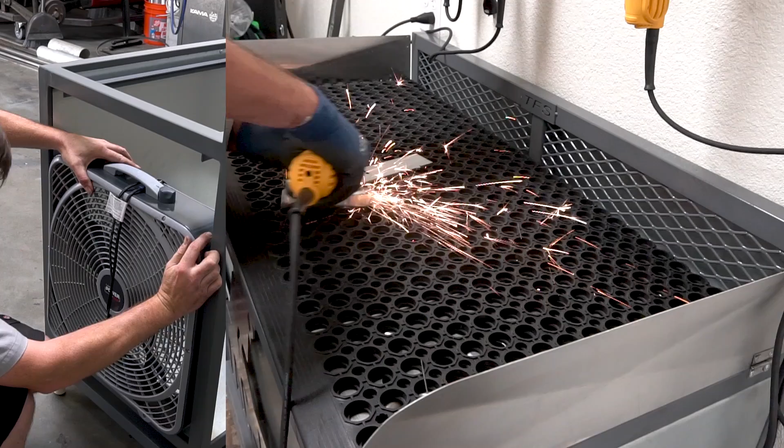The list goes on. But if you lack that kind of budget, or maybe you don't want to spend that much money on a table, or you're just looking for a really cool DIY project for cheap, well then you do what I do. You set yourself up a budget or a target. In this case, I want to spend no more than $500 to make this table fully functioning with nothing more than off-the-shelf components from my local hardware store and a little bit of ingenuity.

You're going to see me using some pretty fancy tools to get this job done. Let me reassure you, you don't need those fancy tools to do it. Let's just take the paneling. If you don't have, let's say, a CNC plasma cutter like I do to do this job, you can absolutely grab a hold of some power shears, double cuts as they call them, a jigsaw with a sharp metal blade on there, or a pair of tin snips. Pretty much anything stronger than a pair of scissors is needed to cut sheet metal that is 20 gauge.

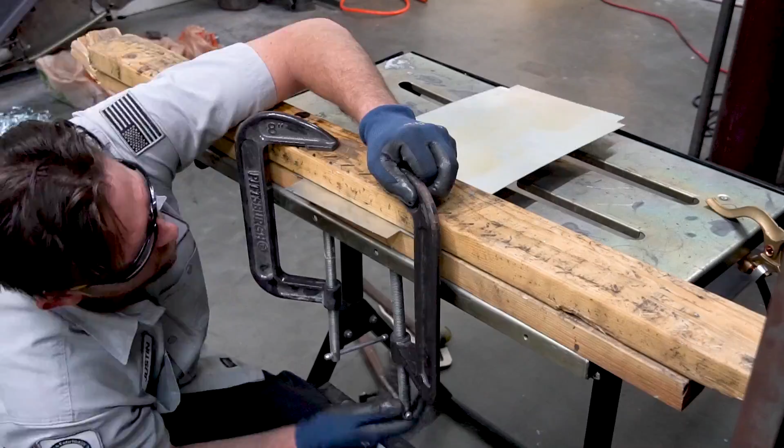That's the panel size that we're using. As far as bending is concerned, if you don't have a box and pan brake capable enough like I do, you can absolutely grab like a block of wood, bang it over with a hammer. You can definitely use some pieces of metal between two clamps and force it over that way. Pretty much anything that will make or shape the part that you're looking to build will work. All you have to do is come up with something clever and make it all happen. Remember, there's no right or wrong as long as the result is correct.

The second thing is CAD. I have to have CAD in order to tell the machine what to cut out. Now, you don't necessarily have to have CAD at all. In fact, I was going to make this cool 3D rendering and spin it around and make it come apart to make the video look cool, but I ended up getting more frustrated because, like many, I already had the design inside of my head, so I could just get to it.

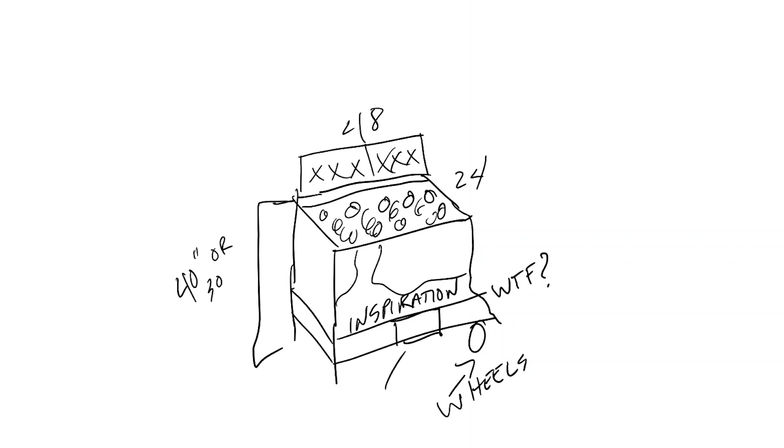I'm starting off with a 24 by 48 inch tabletop. That's the size in general of my table, and I got my height set to about 40 inches because I'm relatively tall. All of this, the steel structure, is going to be made out of 1.5 inch square tubing with an 065 wall. This stuff is cheap, very easy to work with, and let's just get right on it.

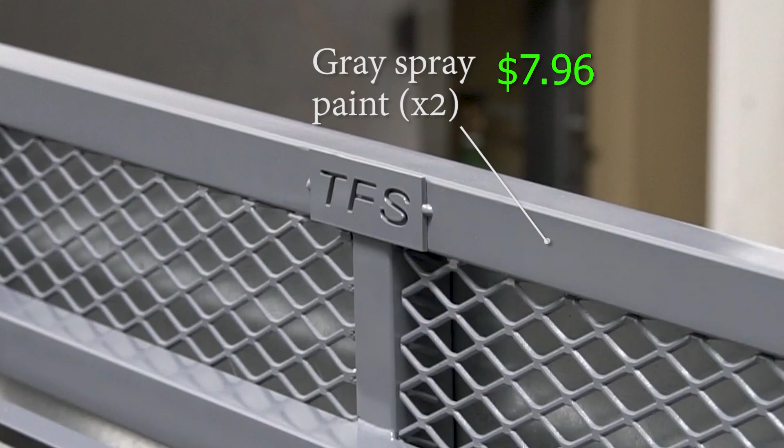Now you might have noticed that there was quite a bit of a jump in that montage that was just put together there. To tell you the truth, the worst two words in the entire YouTube language dictionary are dead battery. So that's why we got a little bit of a jump as to where we're at right now.

But luckily this is just a steel frame design with a few options in it, which we can go over right now. The first one is the back catch. The back catch is built into the frame itself. I've seen a handful of tables out there and they have the catch bolted up to the top of it, and it's kind of separate from the table, but it feels like it takes up a lot of unnecessary space. Instead of building a separate catch bolted to the top, I integrated it into the table by extending the length of the rear tubes and offsetting the tabletop for clearance. So now the sparks and all the junk will fly off the part and go into the tub, thanks to this cheap sheet metal panel that I put on the back here. It just deflects it right down into the tub.

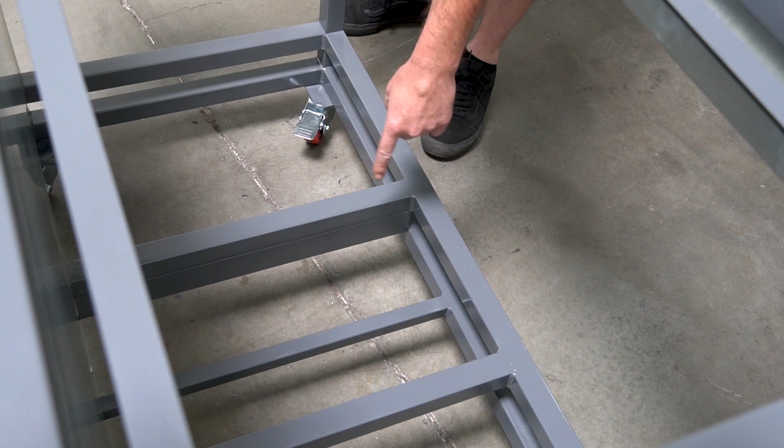Now down below is a section for the drawer. The drawer will make cleaning the tub out a bit easier since I won't have to take the slats off the top for regular servicing and cleaning. I just pull the drawer out, empty it, throw it back in. Now I also added locking caster wheels to only one side.

The opposite side has some tubes with foot pads on it. Now why would I only do 2 wheels instead of 4, you might ask? Simple. 2 wheels cost less than 4, and I only need 2 to move it in and out of the machine room. These legs are from the scrap pile, which cost nothing.

On the front of this machine, which you guys can't see right now, is the name and inspiration for this table that I cut out on the fast cut. I'll reveal that later, but that's why this panel is already on here, kind of blocking it. The big thing to pay attention to here: this is already painted, which means my design has already been made up, everything is done, and I have no more welding to do.

After this, it's nothing but adding paneling. So it's really important that when you get to a stage like this, you are definitely sure before you lay down the paint and all the rest of that good stuff. So let's get some of these panels together and get moving on.

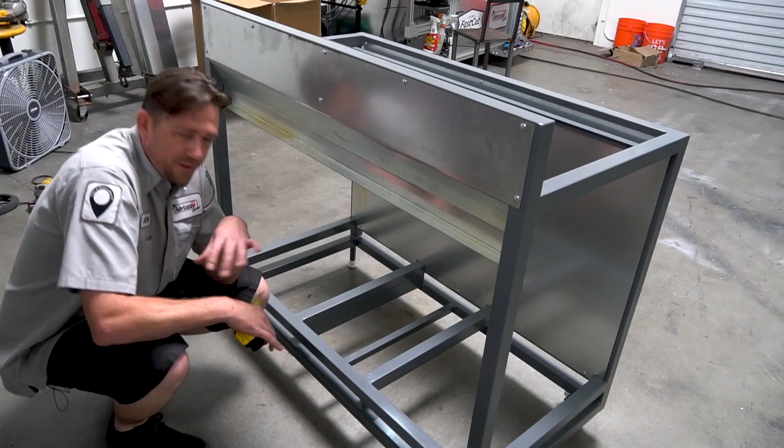There's a couple of things we have to consider when building something like this. One is the orientation and order the panels need to go in here. That's really important for one primary reason: this is a cheap, budget-friendly design, but I don't want it to look like a cheap, budget-friendly design.

I don't want to see thousands of screws all over this thing. I definitely don't want screw heads visible on the front or the sides. On the back panel, yeah, we're not going to worry about that, but I want it to look clean. I also don't want to reach my hand down into the tank or tub and get sliced open by a bunch of screws poking through there. So we really got to consider how these panels are going to attach.

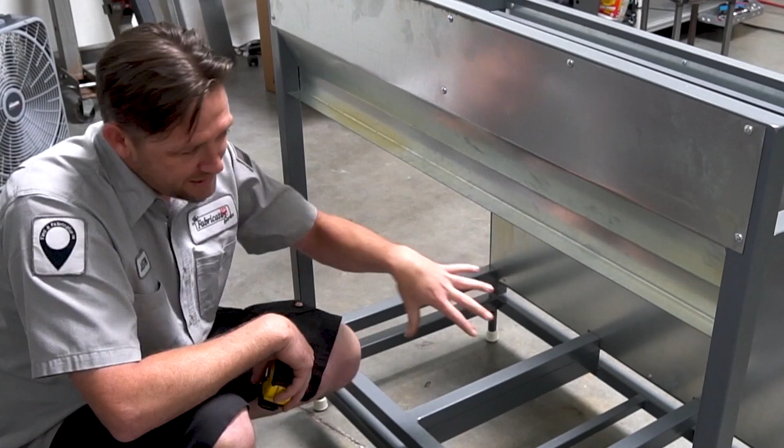The second thing is serviceability. The filters I'm using are very large. They're reusable furnace filters, but with the flow requirements I need with 2 box fans, one on each side, the filter has to be a little bigger than what can come out of the top by my design. So I'm going to do a removable lower back panel that will allow access to the tub for cleaning and servicing the filters.

No big deal there, but the order I put these in is really important. I'm kind of making this up as I go along because I've redesigned this 3 or 4 times, but I know with the order I'm going to use, to minimize the amount of screws, which also drives our budget down, there's going to be a lot of overlapping in the panels, and one single screw will hold it all together.

You'll see all that come together. I have the upper panel for the catch on there, I have the front panel on there, or at least in place, not totally secured yet. The next panel on my list, based on this design, is the floor pans, then the sides with the box fans, then we'll do the back panel last since that's the removable, accessible one.

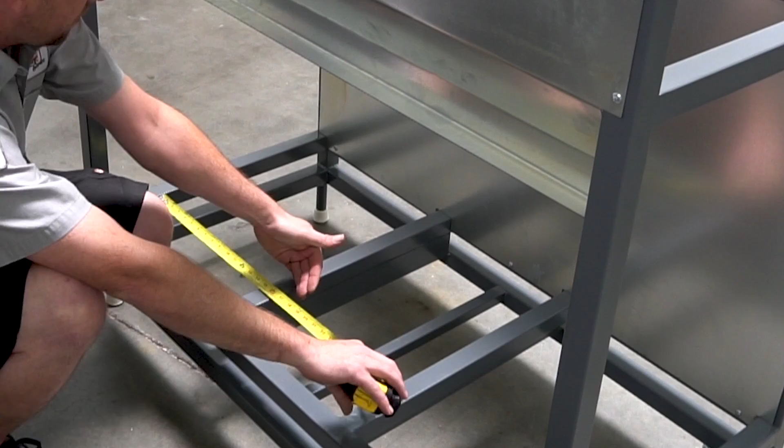First measurement I need here is this lower one. I got 16.5 inches going this way, and 21.5 inches going this way. To make sure all our panels overlap and still fit, we need enough overlap on this tube, but to keep it clean I want to make sure it doesn't go all the way to the edge. I've got 1.5 inches to work with, so I'm only going to put about 1 inch of overlap on this.

On this side, the opposite side, there's that inspirational name for this thing, so I can't drive screws in from the front. Even if I did, I don't want to see them. So where it attaches to the front panel, it will break downward. The rest will be flat with an overlap, a 1 inch overlap.

Over on the side here where it goes down to the drawer, we're also going to do an overlap to keep it clean and make sure no trash gets underneath the sheet metal when we get it all together. So with these dimensions in mind, 21.5 by 16.5, we need to make sure we have 1 inch on each side for overlap. Super simple, let's just knock that out. 2 of them.

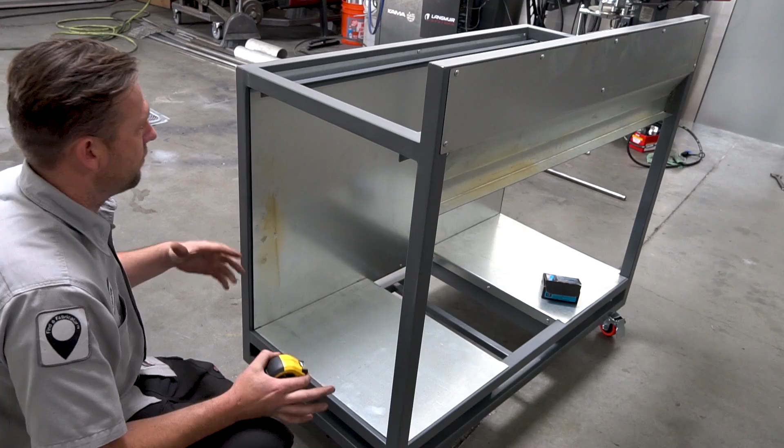First things we need to consider: the total width and total height. In this case, we have 21.5 inches wide. I purposely made it that width so the box fan will fit snug, nice and neat inside here, which it actually does. I'll show you here in a second. The height is 27.5 inches tall. That's the total height of it.

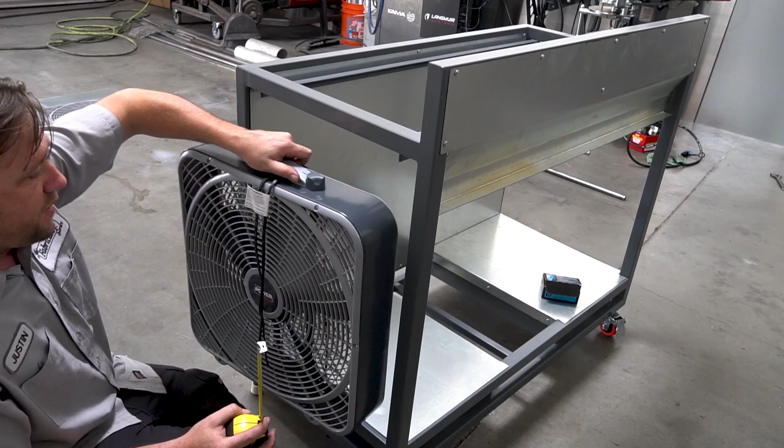Now, which way do we want this panel to face, and how are we going to fasten it? If you look carefully, everything on the inside is close to this edge, and all the screws we intend to drive are going to go into these rails. I don't want to access or see the screws from the outside. Even though this is a side panel, I'd rather make sure it's nice and flush with the front of it. So the face will be flush with these rails, and the inside is where all the screws will go to fasten this panel on, as well as through the side of the fan, because we won't be able to access the brace or anything else like that.

So when we squeeze the fan in here, this is exactly where it's going to sit. We'll have the grill, which is removable, and the sheet metal of the panel actually takes the shape of the inside of this grill. Laugh all you want, but these are cheap and they're surprisingly quiet.

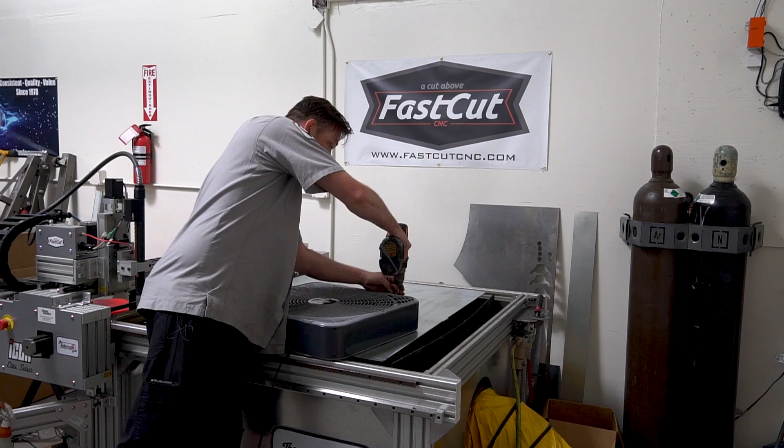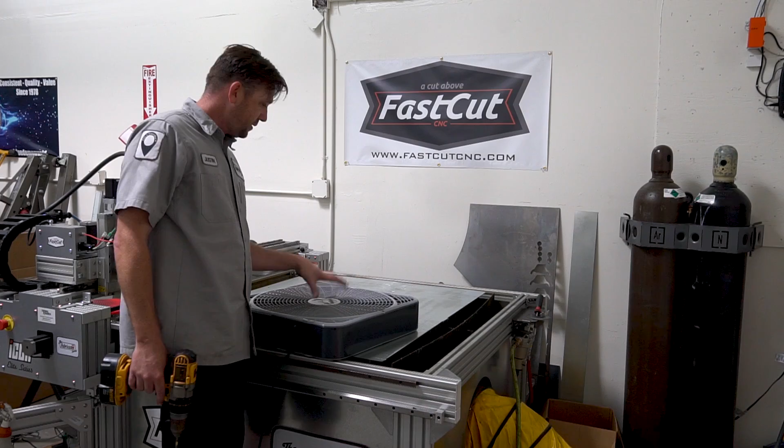Both of these are the width between each one of those tubes. It's almost exact - they left a little bit of room just for the sheet metal and everything else to go in there. So my intention is to basically screw back on this outside piece, this fan guard, and this will be the whole panel on each side. Then you'll just see this on the reveal. Should be pretty clean, but I've got to take it off, get some measurements where these screw holes are, the radius of everything here, and all the rest of that, which I'll do really quick.

On the back side, I noticed that when I turned these on originally, aside from them being quiet, they didn't seem to have a whole lot of power, a whole lot of suction coming out of them. So I'm going to try to increase that a little bit by reducing the general size. I'm just going to stick to this round section right here - it's about 18 and a half, 19 inches. I'm just going to cut a hole around there so it should draw more in that area and less around the entire fan. That's going to try to maximize it.

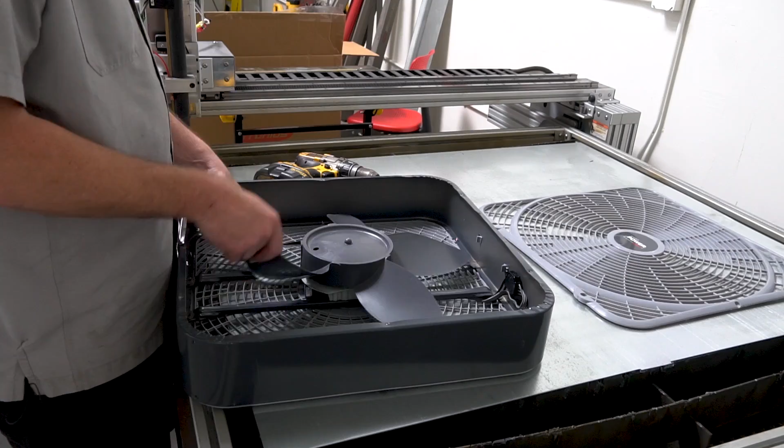I've also doubled the amount of fans I've got to use here, one on each side. You'll see all of that as I go along, but I've got to get this all off here and see how everything measures out. Maybe I'm getting older here when I say I remember when these things could cut your fingers off. As long as it works, I guess.

21.5 is the total here. We're going to reduce the size of the opening down to, let's just say, 20 by 20. That should be the size of the opening - I think that's what we'll do there. We'll figure out what radius this is right here, and then we'll go cut all this out.

Now the full length of this will be the distance that we have in the table, the full width of it too. Break them both inward a little bit, that way we can mount it all. Screws will actually go through the box fan into the framing itself along with the rest of the paneling. That should hide those - nice clean reveal on the outside. Let's get to it.

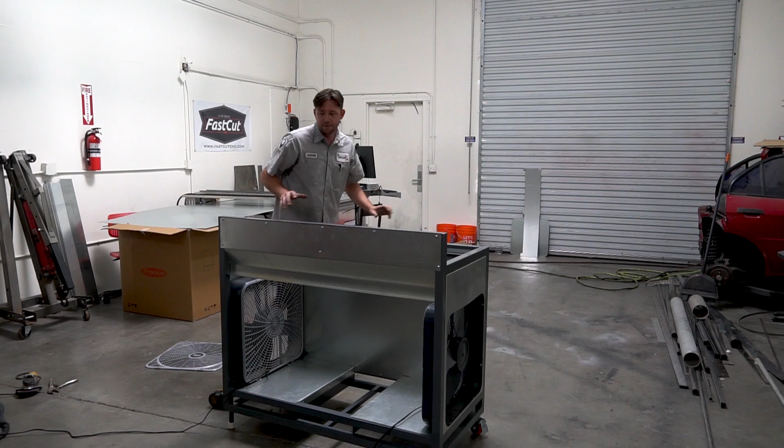Okay, I can't resist. That is just so clean, and these fans fit so sturdy. I gotta see this. I mean, of course they work, right? They're brand new fans, but I thought they'd be a lot louder than that. I'm not shouting over this - they're not very loud at all. That is so cool.

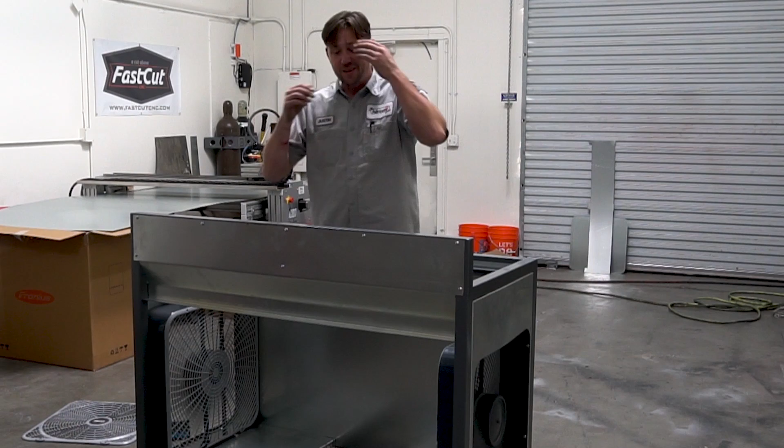Okay, I gotta hurry up and get these other panels on here now. This is way too cool. I want to finish this up. I gotta not get ahead of myself, but yeah, let's get this other panel measured out here. I can't wait.

That's 23 and like an eighth, which is good for clearance, by 45. So let's just cut that out and pop that sucker in there. I gotta see this - this is cool.

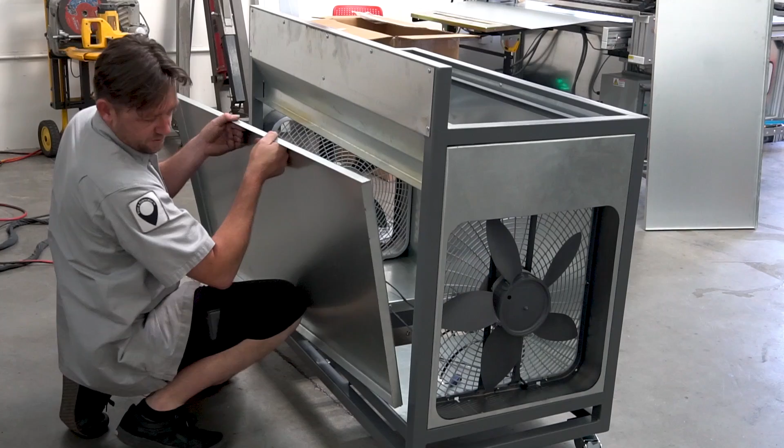You know, hey, sorry if I didn't show all of that. I'm kind of excited here, I really want to see this go together. I mean, it's just like any other panel, nothing special.

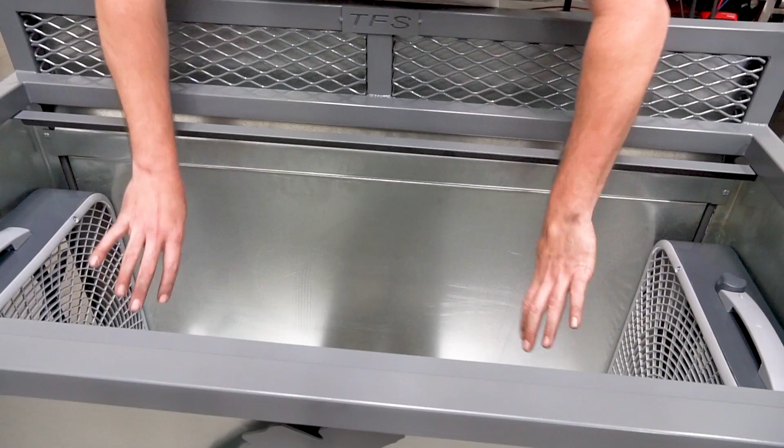Holy wow, look at this. This is just clean. So now what we got to do is take these grills off of here, cut some new panels and faces for those, and then install our filters. Now the filters are important because, well, it's great that it sucks it all out, but if it blows it back up into your face or around the rest of the shop, well this whole table and setup is kind of useless. So let's get those filters in there, and this should be pretty easy to do, a little bit tricky maybe, but I got an idea.

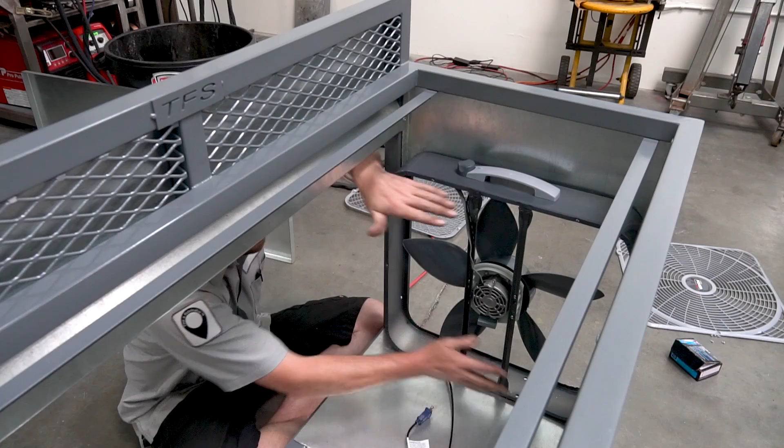Let's get this going. Now our filters are gonna go onto here, and I need to reduce this area to provide more suction from these fans out of there, right? I don't want it to come through all of that area. I just want it to be about the size of where the actual fan itself is. So we're gonna cut a piece of sheet metal to go around here, and it's also gonna have our filters.

Slide in through the back of it. Again, I don't want to have any screws or anything seen from the front. I don't mind if there's some on the back, and I don't really want them on the side either. So whatever we do that's going to go on here is just going to attach to the fan and then kind of wrap around and completely seal it off. So what I need to do is find out the diameter, which that's about an inch away from this box fan.

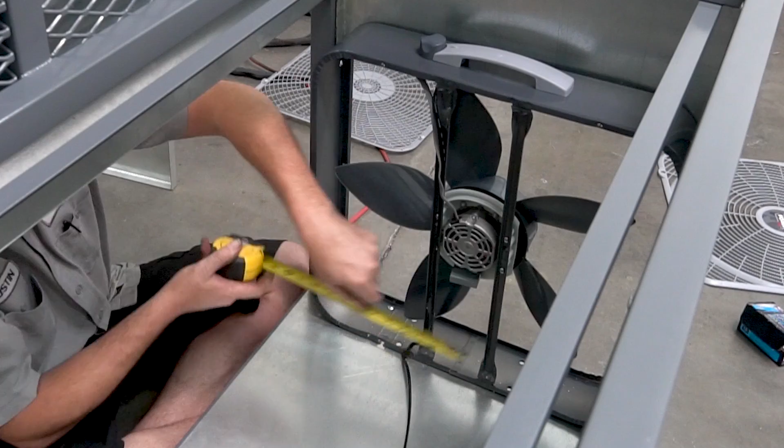And since the box fan is 21 and a half inches wide, then we need to subtract an inch from both sides. That's the diameter of the fan that we're gonna cut in from the actual, from inside there. And I'm just gonna make sure it comes out to an inch down here away from this side. So it's gonna be in the center of that 21 and a half inch cutout there.

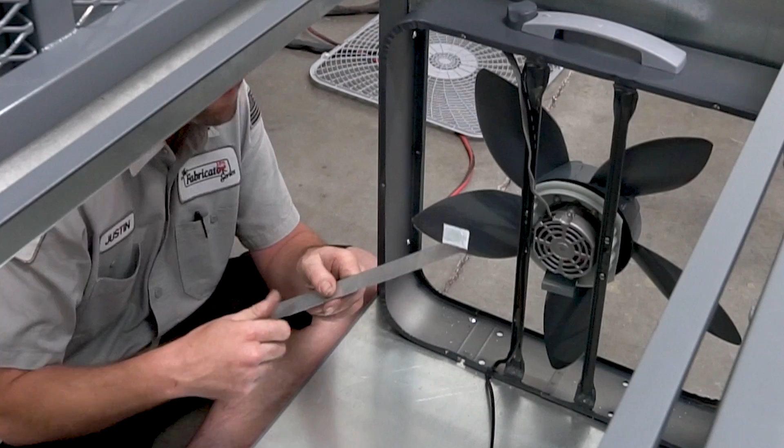The second thing I did was go out to my brake real quick with a piece of scrap metal. I bent it all the way as far as it can go, maxed out, which when you measure one of these out, it comes out to 135 degrees, right? Now this section right here will mate up there and seal on nice and tight.

But instead of trying to sit here and eyeball where that angle goes or set this up or anything else like that, I just took this piece of sheet metal right here at 1.25 inches with the width of a tab on here. We're gonna set it up. I'm gonna bring it down to the point where it just touches this fan.

Now what this is gonna do when we get this piece all bent up is it's gonna protect these, all the electrical and stuff like that, and it's also gonna be a drop for all of the junk or anything else like that to go on there. Just like the back here has that deflection on the back of the catch.

This I want to deflect downward. I don't want any junk just sitting on there. I'd rather it just sit on the floor and I could scoop it, or push it into the drawer down there. So what I'm going to do is take a Sharpie at the point right about roughly where it.

Touches or so, and I can see from the side where it's going to wrap around down the metal there. You know, it's 20 gauge. Well, I kind of missed. Oh well, doesn't really matter. I just made a mark where it's going to go right in front of there.

And if we take a measurement here, we're about 5 3/4 inches or so, which I could get away with about 6-ish. So 21 and a half plus the inch to go underneath the fan, or to wrap underneath the fan, or maybe even out like this to give us to the floor to attach to. So 1 inch there, that's 22 and a half plus the, what, 6 inches or so, plus another 1.25 inches. That is the total length.

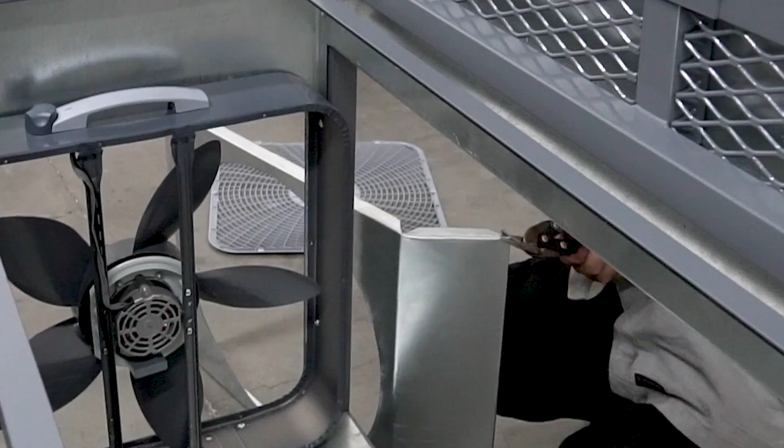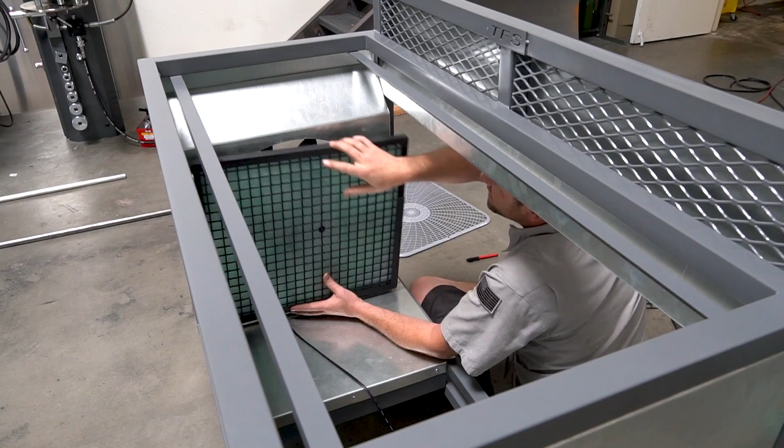Alrighty, time for some filtration. This is about where I want it to go. I'm basically centering this above. Make sure it's right there centered so it's not too far over this and too far over that, the diameter of our fan here, or access to our fan. Want to keep it nice and snug, tucked up against there.

Of course, when the fans start drawing in, they'll keep it kind of pressed and sucked up in there, but the channels or the tracks that I'm going to build for this, I'm going to have some little tabs that keep them pressed up against the actual part itself, and then we'll worry about sealing that off if we need to.

We'll see what it's like. So that looks to be about an inch or so up from there, and down from there. Let me take the tape measure real quick just to double check. Yeah, that's about an inch there, about an inch there, and this is roughly 3/4 of an inch thick or so. So we're gonna go 1 inch up, 1 inch out, 1 inch down to cover the face of it. A couple little tabs in there, no big deal. Easy day.

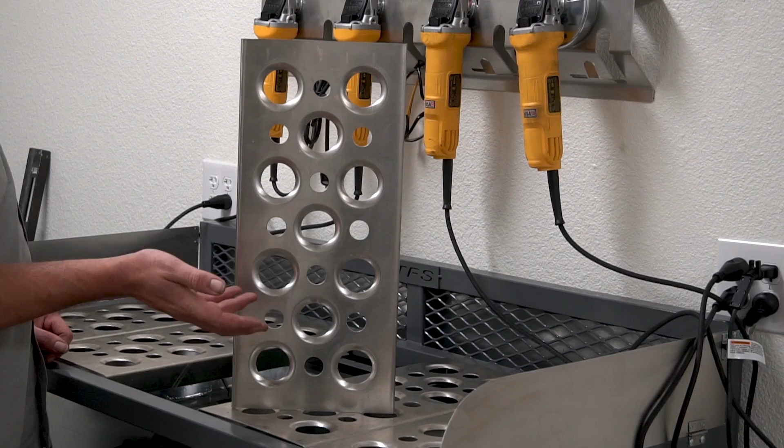Now, if you've ever priced out stainless steel, you know you're going to use aluminum. The thinner the aluminum is, the less money it costs. But the offset on that one, the thinner it is, the less strength it has. In this case, I wanted to use something that was strong enough to hold the parts that we have on here to grind, but not so strong or so thick that I can't even work with it, or it exceeds the budget just buying the aluminum itself.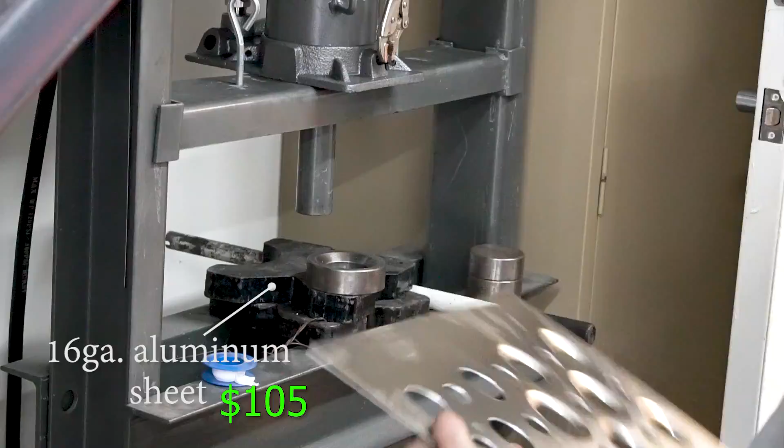Instead, I opted for 16 gauge. This is plenty strong enough to hold the majority of the parts that we have on here because it's not like the size of a car that's going on here. And the ultimate solution here, since we have to have airflow going through it and we have to have holes, I decided to punch out the larger holes with dimple dies, which strengthens up the panel. So with that problem solved...

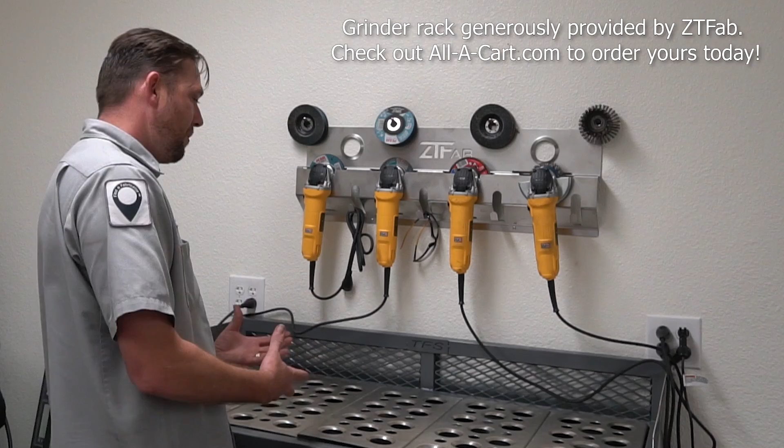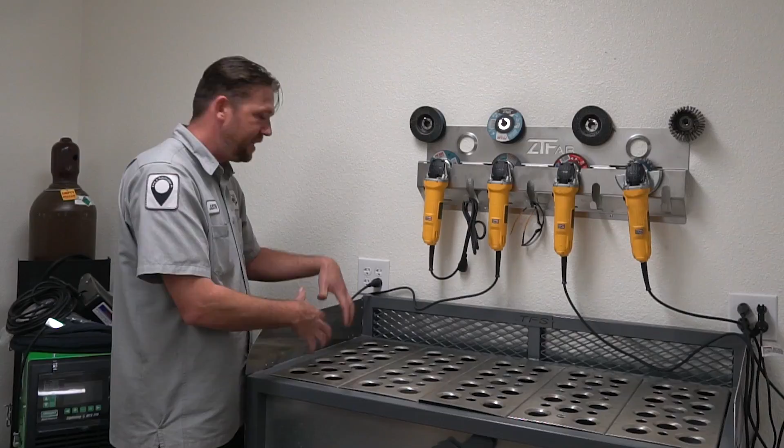On to what's next. We're not always going to be in the perfect grinding position for the sparks and dust and everything else to collect in either the surface or the back catch. What if we're grinding this way and the sparks are shooting that way because that's the only place we can be? Well, we need something to stop that. That's where the guards come into place. They will either deflect it or keep everything basically contained in this area, providing that your part fits on the table. But therein lies another problem. What if your part doesn't fit on this tabletop? You got to come up with something that allows it to fit on there.

So if you've been keeping up with our budget so far, you know that we're hitting just over 400 bucks to do this entire table. Now, at a bare minimum, everything that we've done so far is all you need. But in my eyes, I see upgrades. Let's see what else we can put on here.

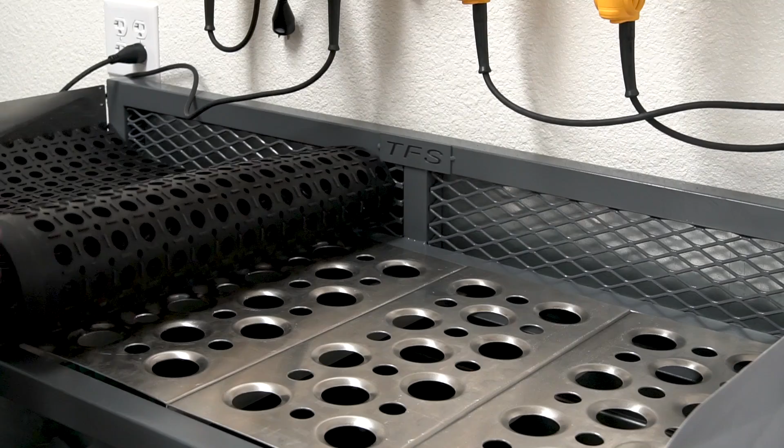The first upgrade that came to mind is on that tabletop or the grinding surface itself. Now on most tables you'll see a bunch of rubber grommets that go into all of these holes, and those help keep the part in a steady stationary place, basically meaning you can run hands free, grind all you want, and it's not going to slip around. Now I like the idea, and I was originally going to do that until I priced out a bunch of grommets and found out that $200 and some odd was definitely going to exceed my budget.

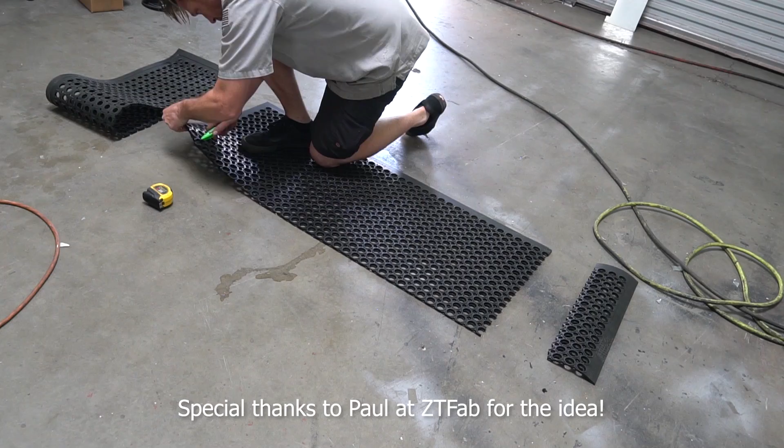Instead, I grabbed an anti-fatigue mat. This had to be trimmed down to size, but the beauty of this is it's way cheaper than grommets, and as it sits over the grinding surface, it keeps the chatter down. It mostly absorbs it. That's kind of a nice thing.

There is one part of this build that I am not including into this budget. The primary reason is because it offers absolutely zero integral role toward the function of this table, and I cut it out of scrap metal, so it was free anyway. But we encountered a lot of resistance in the beginning of this build, especially while we were building it. A lot of people said that box fans simply won't function on a downdraft table, even though they were working quite well. So I became inspired to name my table. I needed something that the moment you looked at it, you knew exactly what it was going to do. But what could I put on the front of this to make such a point?

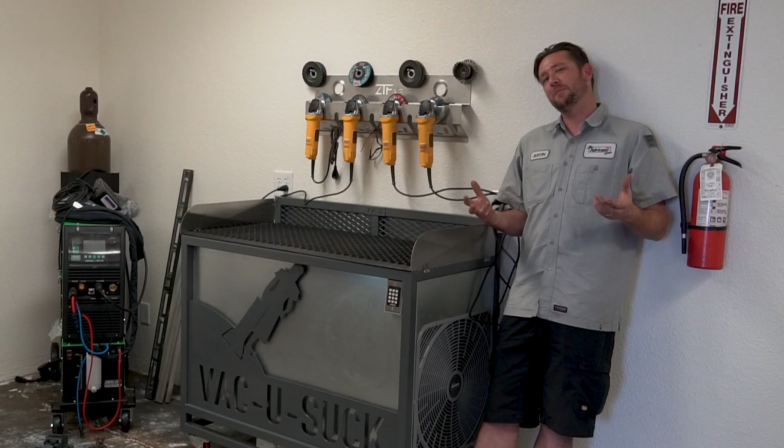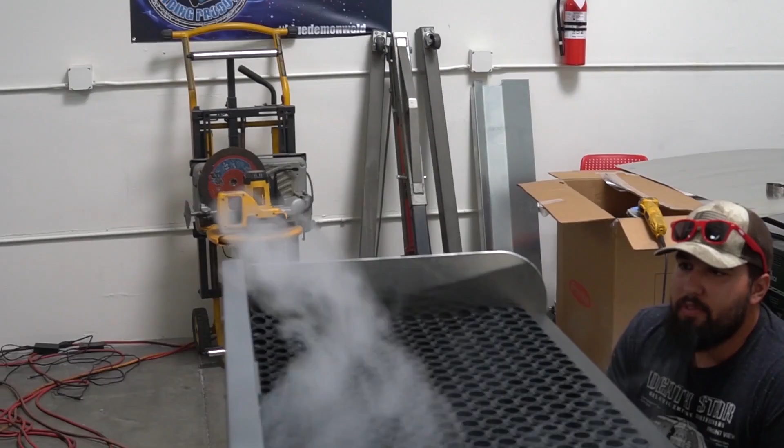And just for some added fun, since I have the room left in my budget, I bought a combination keypad and a relay to switch the table on.